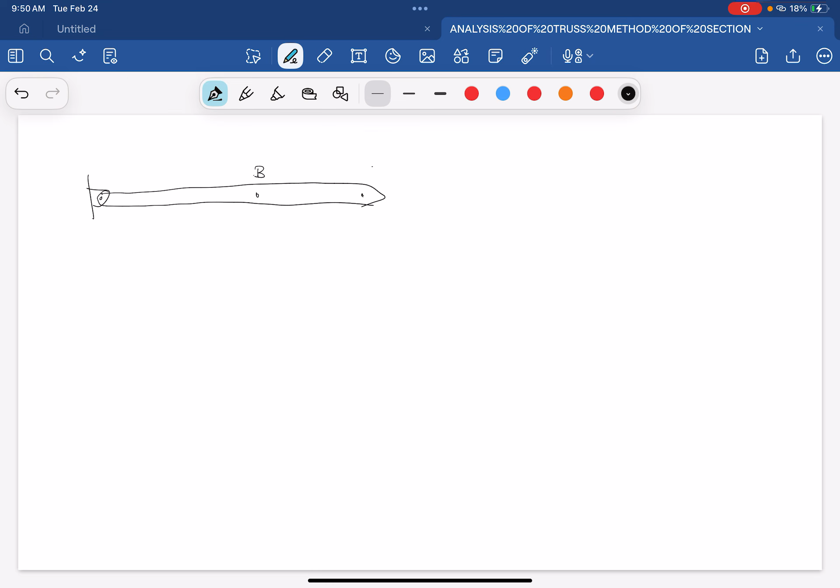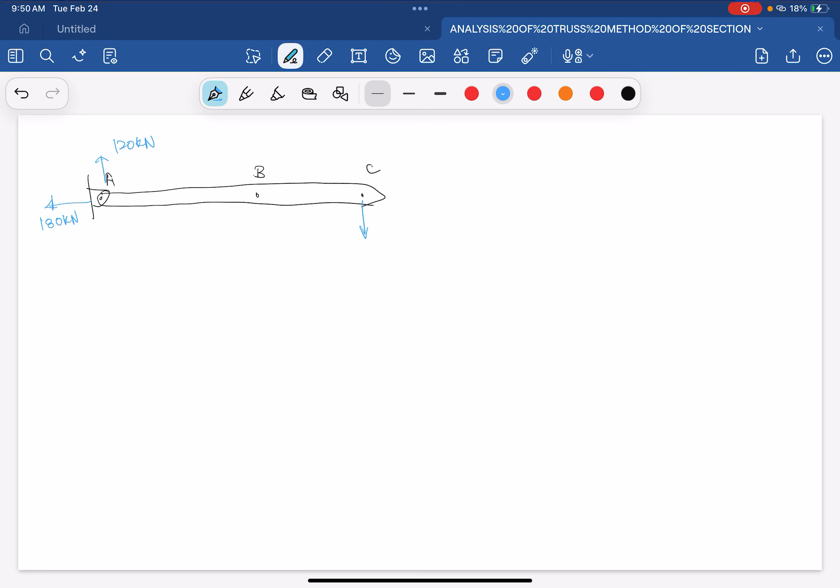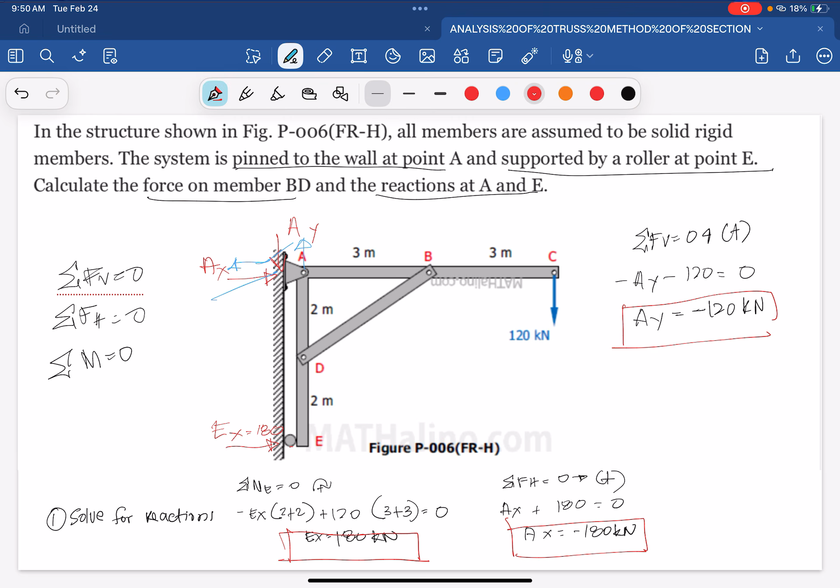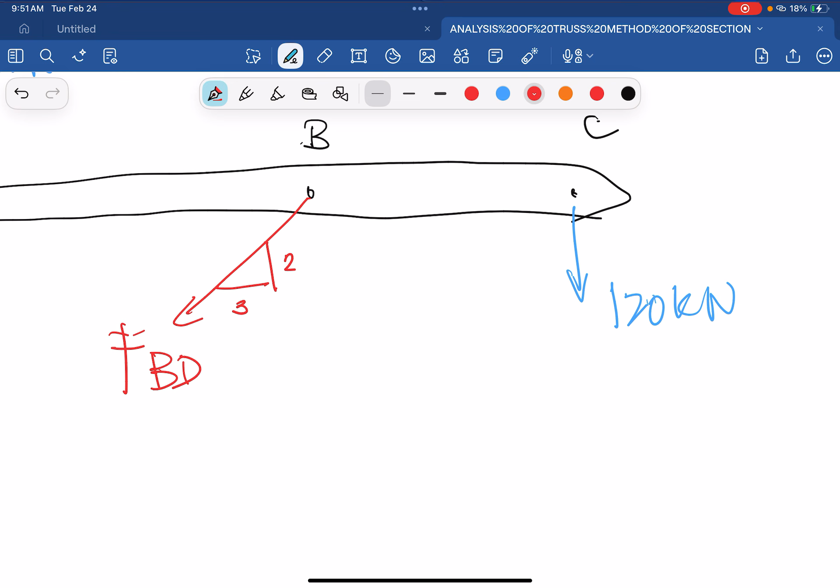And AY na upward na 120. And then, meron tayong downward dito na 120 kilonewton. And then, yung ating BD na pa-incline, force BD. And then, yung kanyang slope. Paano natin mahanap yung slope? We have the vertical na 2, and then yung horizontal na 3. So, i-project lang natin dito. Meron tayong vertical na 2, 3. So, ang ating magiging slope using Pythagorean theorem is square root of 13.

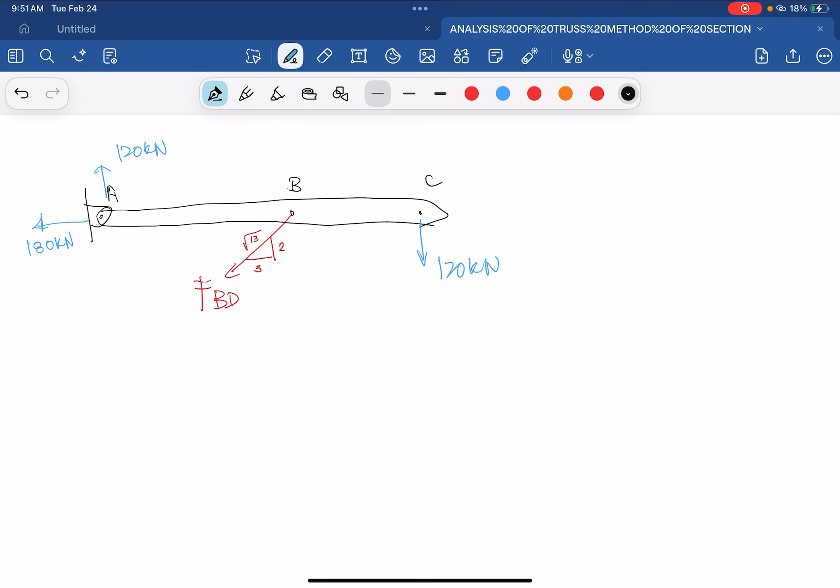Ngayon, ano po ba yung pwede natin gamitin in computation? Since FBD na lang naman po yung nawawala, pwede na natin gamitin si summation forces horizontal or summation forces vertical. So, kahit alin po sa dalawa is pwede nating gamitin. So, ngayon, gamitin po natin si summation forces vertical, upward is positive. Ngayon po, ano yung mga values na kasama natin sa vertical forces? We have the vertical reaction na 120, positive. We have the negative 120 na...

Hindi po pala. Kasi kapag nag-ΣFV po tayo is magkakaroon lang ng zero forces. Ngayon, ano po yung pwede nating gamitin? Pwede po nating gamitin yung summation moment at A equals to 0, positive. Okay, so project natin dito. Meron tayong vertical kay FBD and then horizontal kay FBD. And then yung distance po niya na 3 meters.

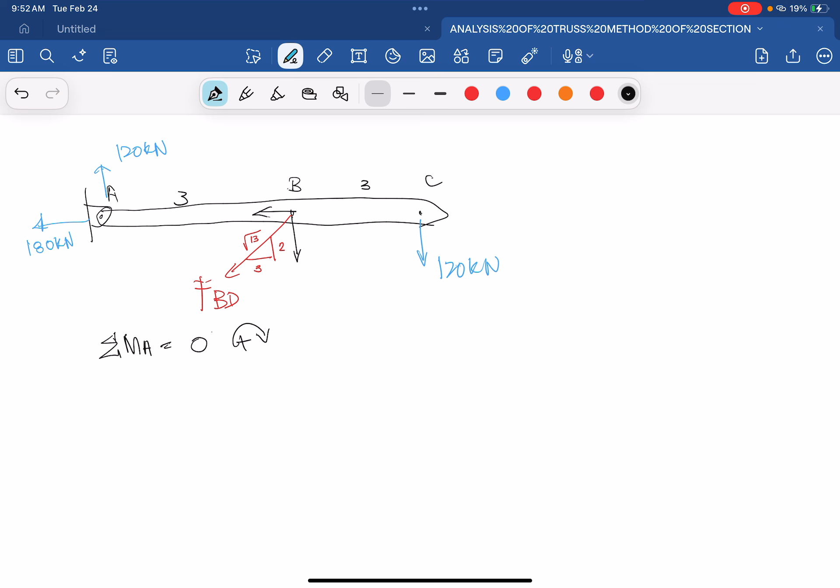Ngayon, ano po ba yung mga magmo-moment kay A? We have the 120 na clockwise. So, we have 120 times yung distance niya na 3 plus 3. And also the vertical forces ng FBD mismo. So, positive FBD times yung slope niya na vertical slope 2 over square root of 13 times yung distance niya na 3 is equals to 0. So, kung i-compute natin sa ating scientific calculator, we have a value of negative 432.67

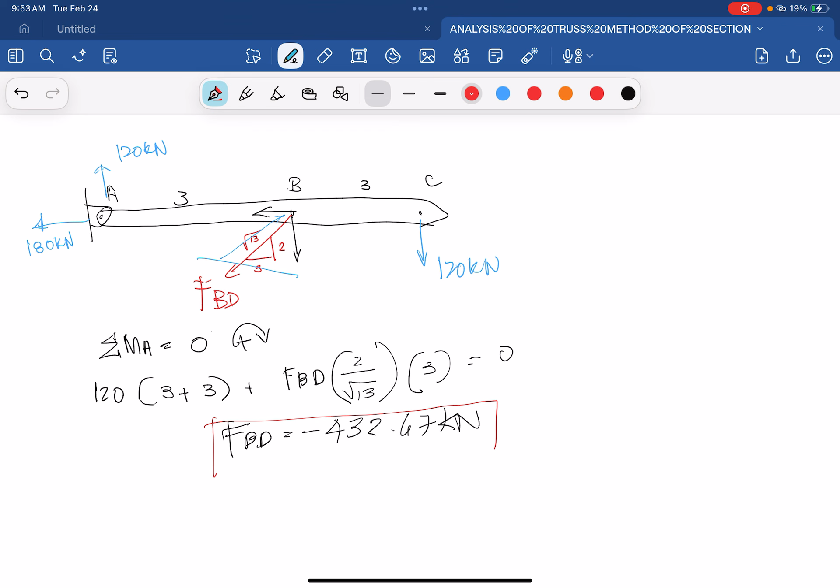kilonewton. So, since negative, ibig po sabihin, mali yung assume nating direction na tension, pa-compression po siya. Pa-compression po pala siya. Ayun, to the point siya. Since na-solve na natin lahat ng hinahanap, okay na po tayo doon. Huwag na po nating i-solve yung mga hindi po hinahanap dahil hindi rin naman po siya, kumbaga, relevant doon sa mga hinahanap.

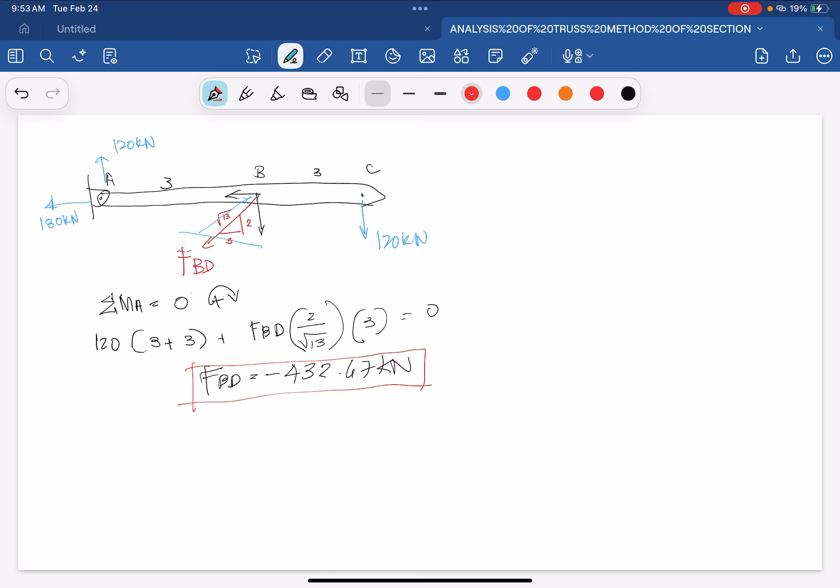Pero kung gusto niyo namang i-practice and may mga sa tingin niyo nawawala pang member force, then you can try to solve all the forces in members. Ngayon, again, recap lang po tayo. Sa pag-compute ng ating method of sections, we have the solve for reaction using the three equilibrium formula.

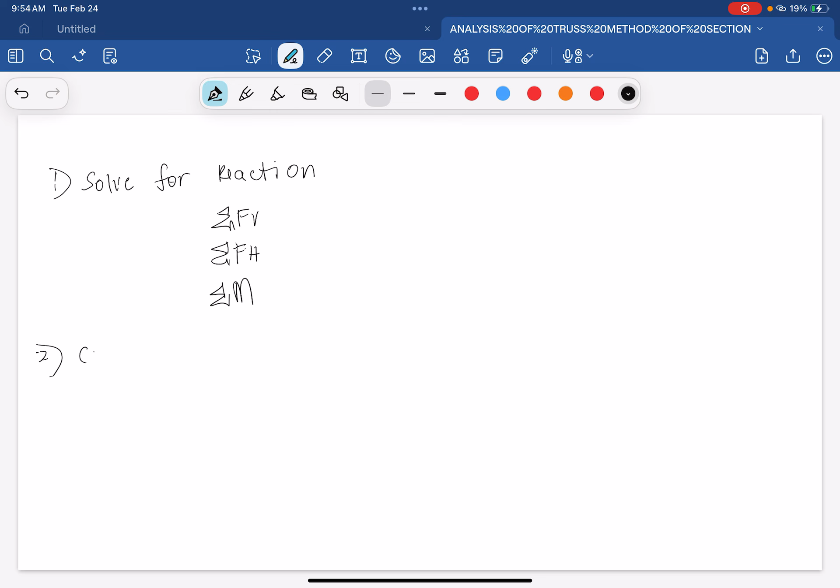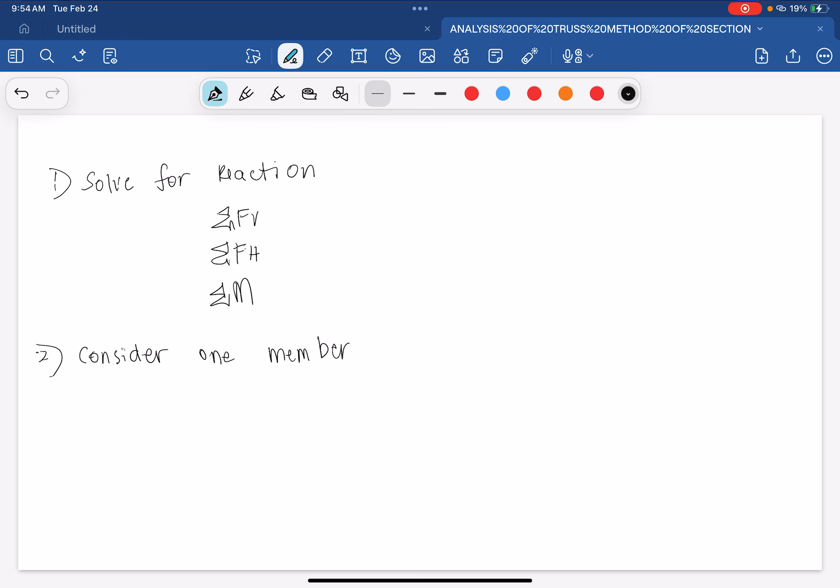And then, pagkatapos natin ma-compute yung reaction, we will now solve or consider one member to isolate. So, yung i-isolate natin, doon tayo kukuha or doon natin i-identify yung mga internal forces. Ngayon, if consider one member to isolate, tapos, isosolve na natin yung mga internal forces.

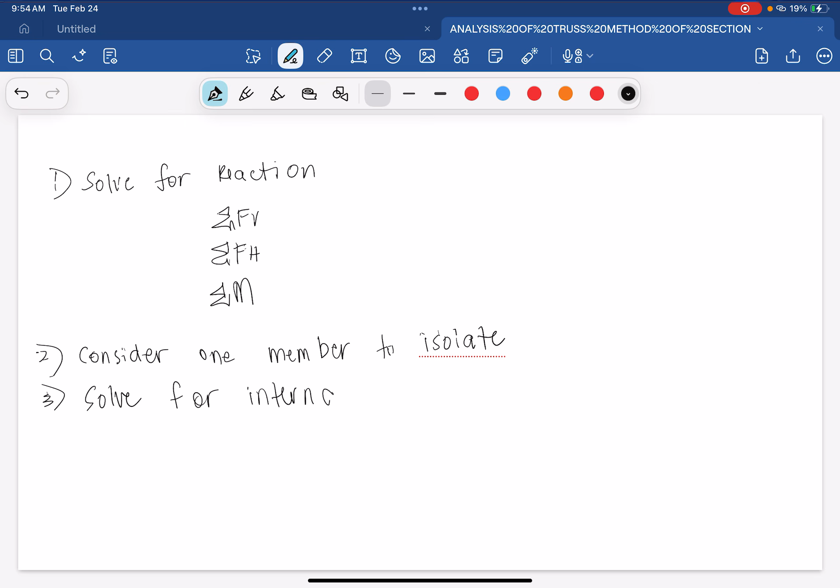Pero, huwag niyong kakalimutan na always consider yung two unknowns lang. Ayun. Always consider yung two unknowns lang para mahanap natin yung mga internal forces.

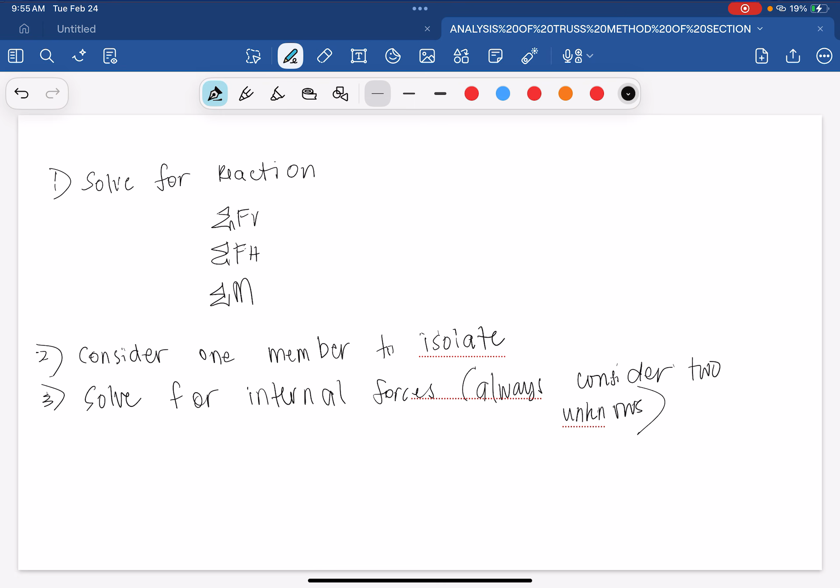Ngayon, sa pagko-compute ng internal forces, again, we can use the equilibrium equation para ma-solve yung ating internal forces. Ngayon, if medyo nahihirapan pa po kayo, I will give some example problems pa, which you can apply yung concept natin. So, ayun lang, konting tiyaga lang since lahat ng computation sa ating statics of rigid bodies is process method po talaga siya, step by step.